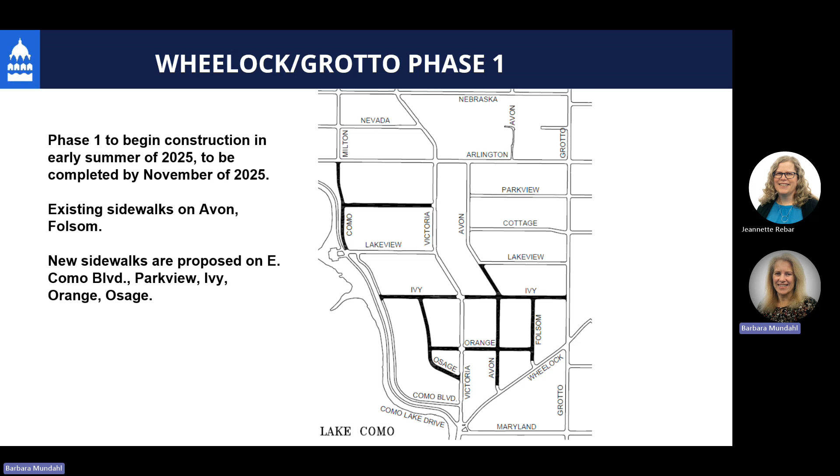There are existing sidewalks on Avon and Folsom, and existing sidewalks on one side of Ivy and one side of Osage. We are proposing new sidewalks on East Como Boulevard, Parkview, and Orange, and then also new sidewalks on the other side of Ivy and Osage.

Paving projects strive to implement council-approved policies. The sidewalk policy was passed in 2017 by the City Council, recommending sidewalks on both sides of an improved street. For more information about the sidewalk policy, please see this link.

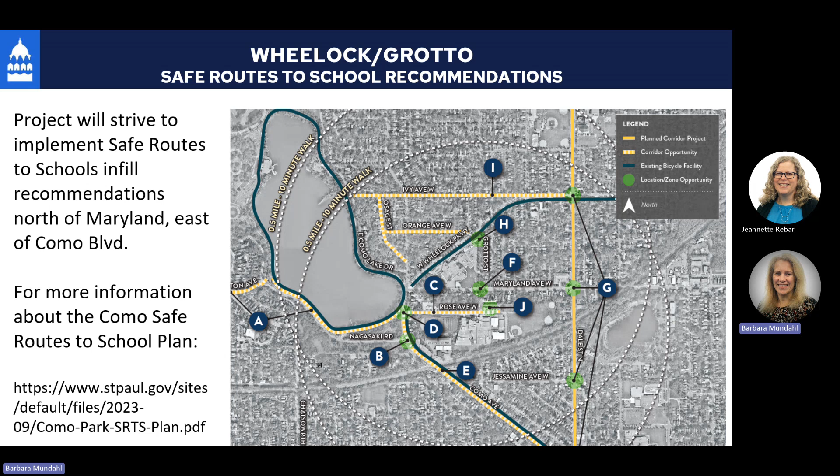Now, for the new sidewalks, we will try to meander them as recommended by St. Paul Forestry to minimize impacts to mature trees. We will also be following the safe routes to school recommendations for new sidewalks. There's a safe routes to school plan that has been created by the area schools, Como High School and the elementary schools as well, which also recommends filling in sidewalk gaps.

Again, average street widths vary from 28 feet to 32 feet wide, with existing sidewalks on both sides on Folsom and Avon. Ivy has sidewalks on the north side only. Orange and Parkview have no sidewalks on either side.

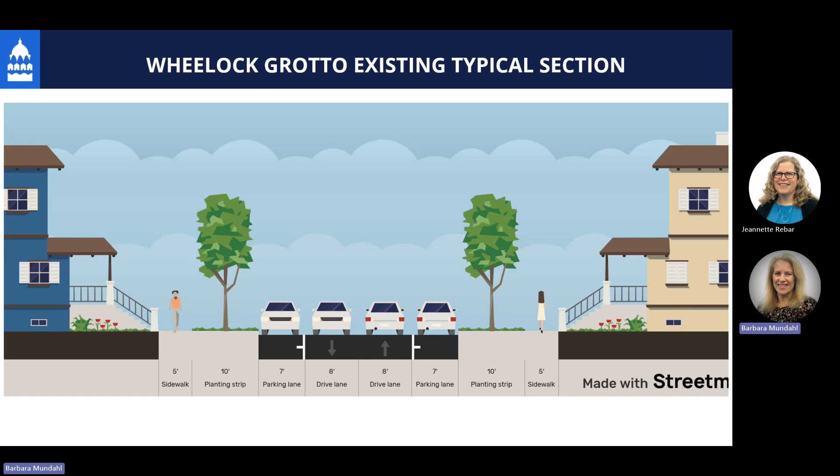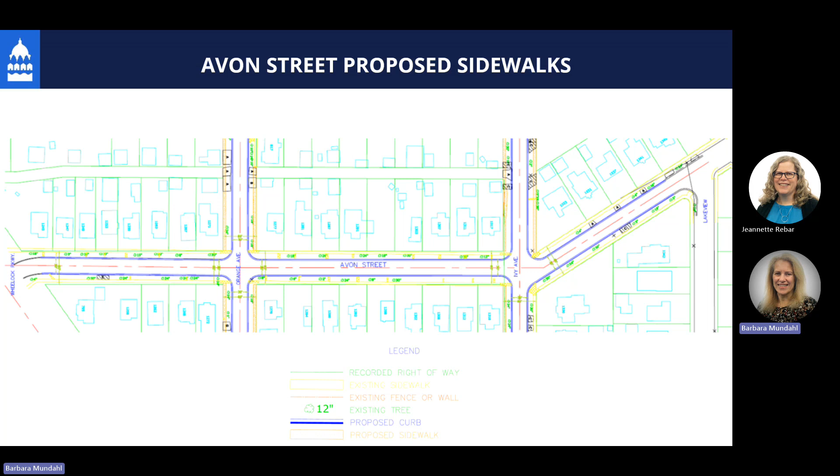So on Avon Street, since there are existing sidewalks on both sides of the street, we will simply be replacing existing sidewalk as necessary. Same with Folsom - there's sidewalk on both sides of the street, and we'll replace as necessary.

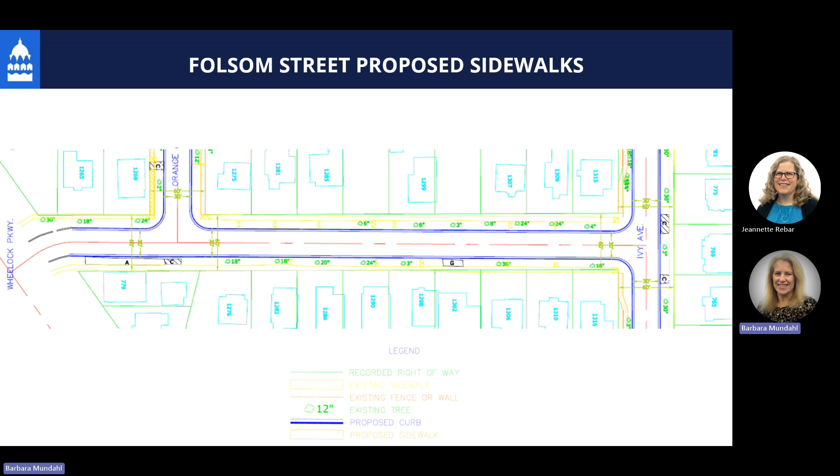Ivy has sidewalk on the north side only. We are proposing to put sidewalks on the south side of the street. We will meander those sidewalks to avoid obstructions such as existing walls and fences. That meandering may impact a couple of trees. Again, we'll be following St. Paul Forestry's recommendations.

Just more on Ivy, meandering to avoid obstructions.

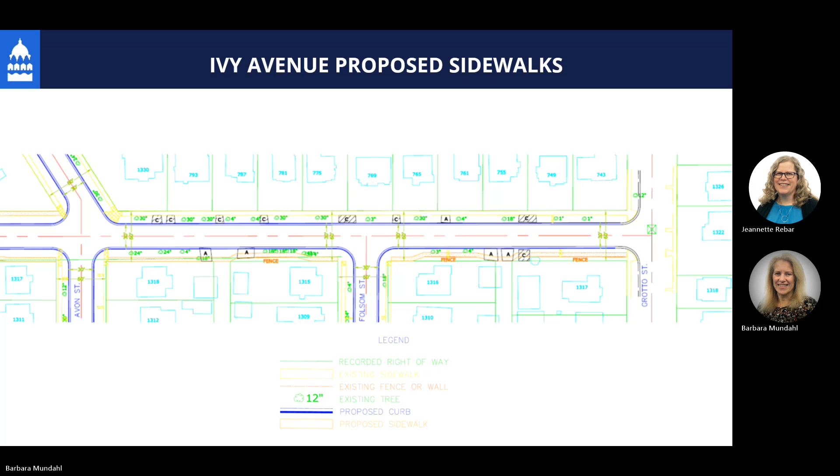There's some existing sidewalk on Orange Street, but we are proposing where there is no sidewalk, we are proposing sidewalk on both sides of the street. On Orange, we did not encounter any obstructions, so we will be placing the sidewalk on the property line.

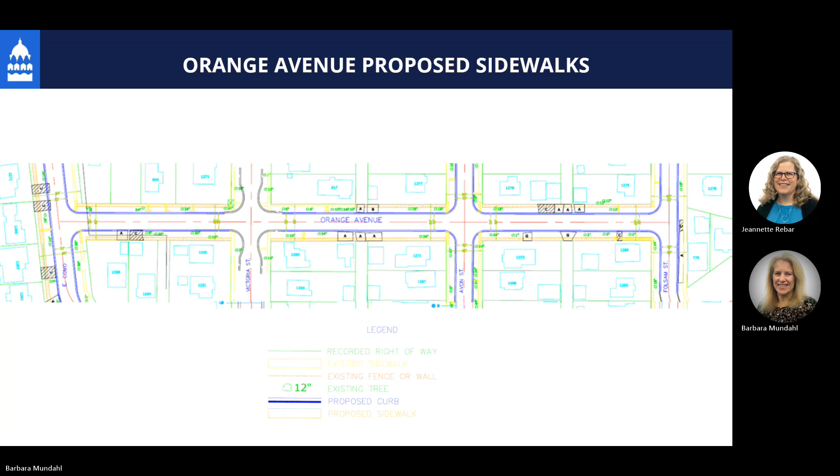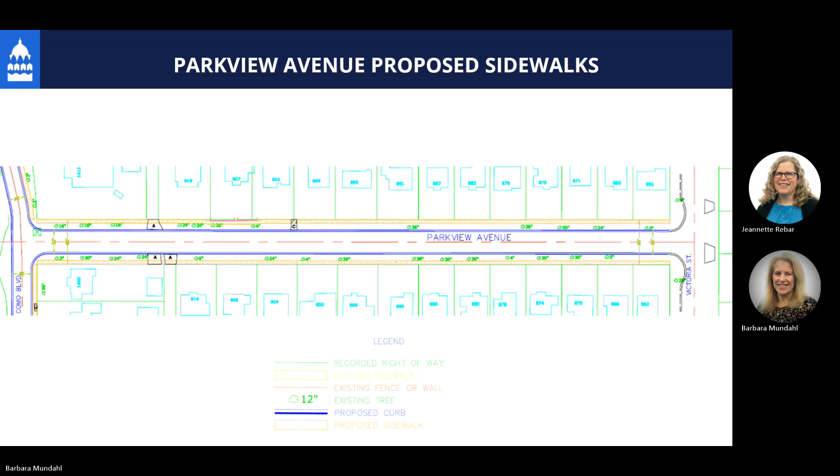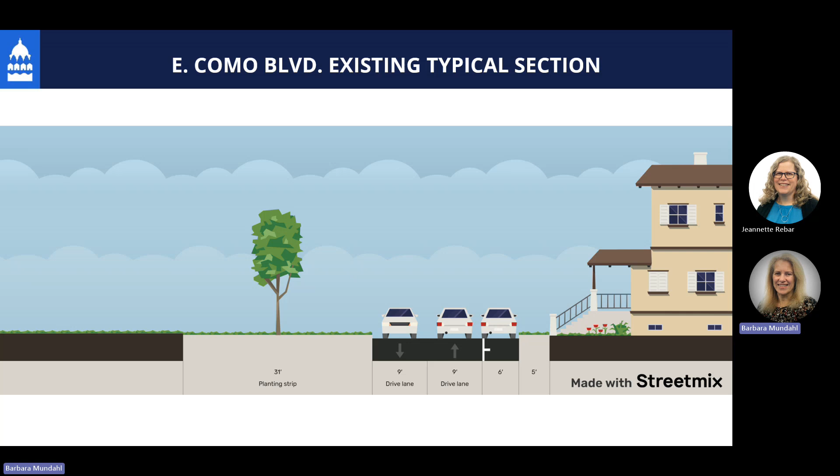East Como Boulevard's street width varies from 24 feet wide near Lakeview to 28 feet near Arlington. We plan to keep the street width pretty consistent. We're going to borrow a little bit of land on the park side so that we can keep a consistent street width and then also add a 5-foot wide sidewalk.

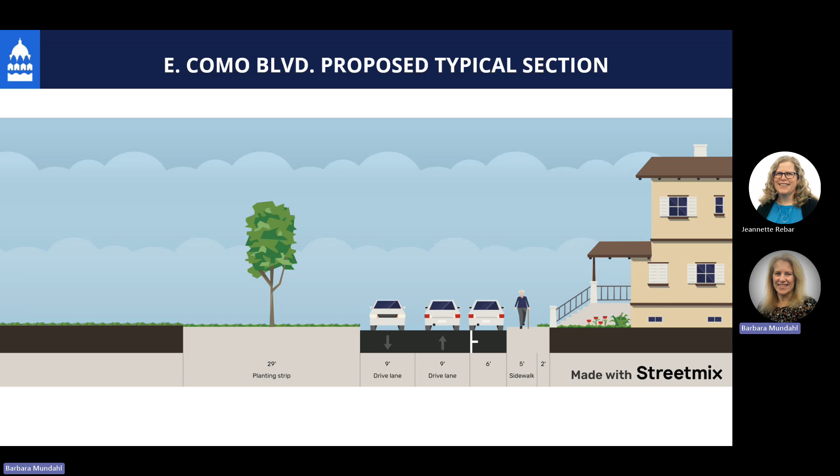And here's what that would look like. I apologize, I should have mentioned that the blue lines are proposed curbs, the yellow are proposed sidewalks, and the green are recorded right of way. There is a legend - it's a little hard to see here, but there is a legend.

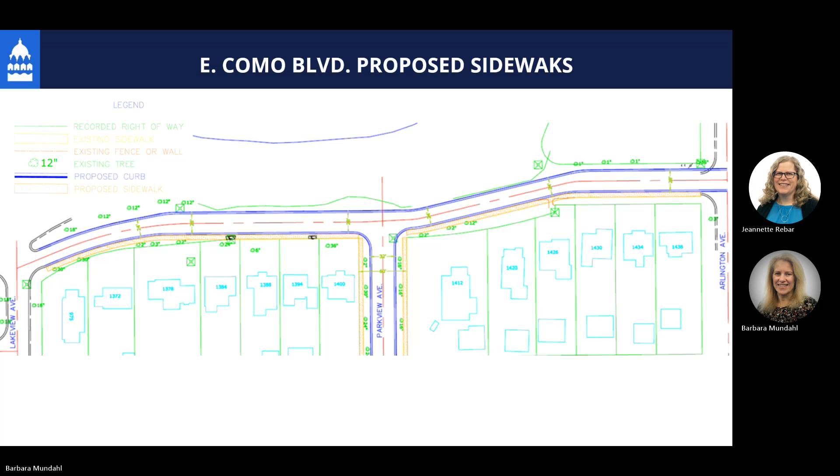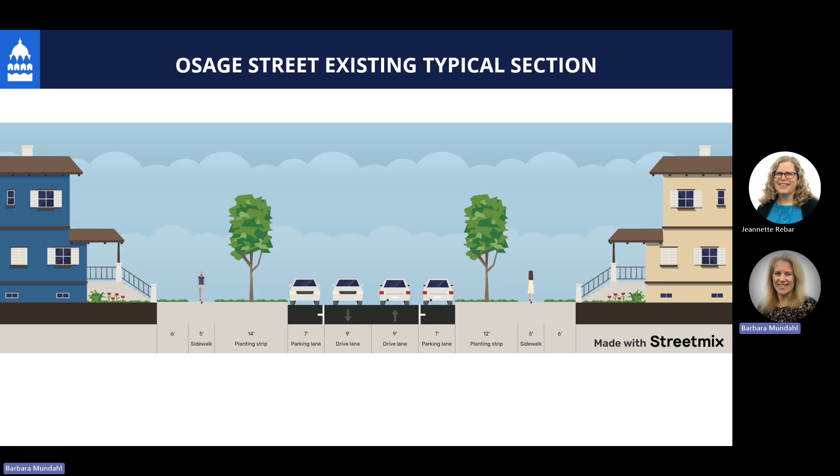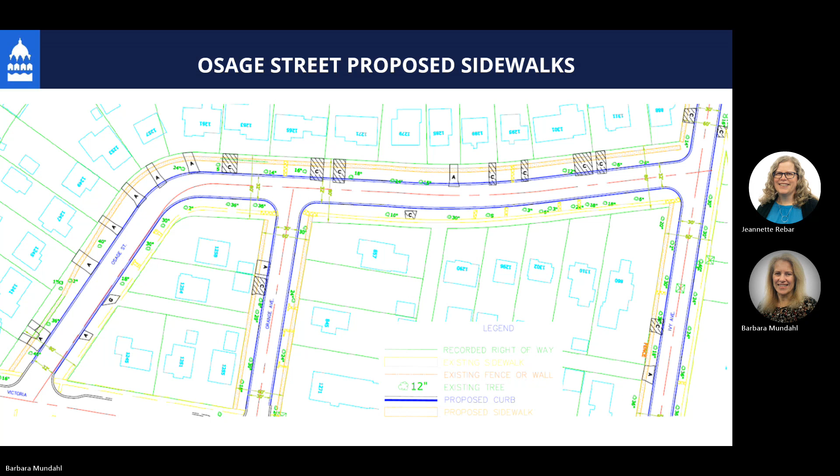Here is the proposal - again, yellow is the proposed sidewalk. Feel free to contact me with questions about the sidewalks. I'd be happy to look at each individual property and talk you through what is being proposed. And again, thank you for listening.